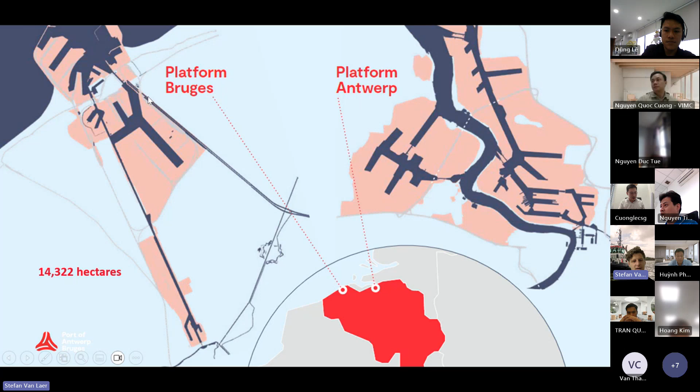So fluvial port, deep sea, but our platform in Bruges is really at the sea and gives us some opportunities in terms of LNG, for example, which I will come back to later.

Yes, you know this already also. So we're the second largest port in Europe, right after Rotterdam, who are our neighbors not so far away. We're the biggest logistical hub in the range of Hamburg to Le Havre. And important is that we're the largest integrated petrochemical cluster in Europe, and actually even the second largest worldwide after the port of Houston. So quite important.

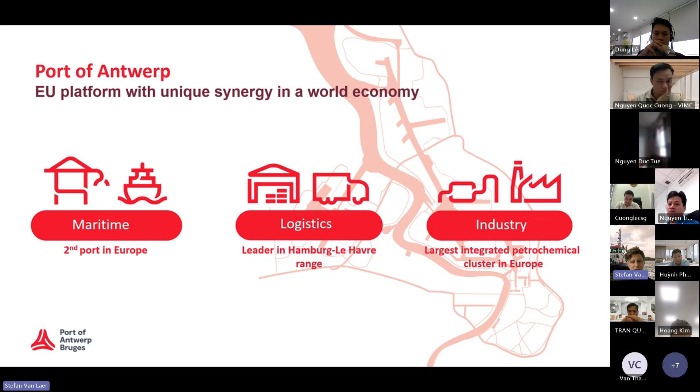Some numbers you already know, but maybe I will focus on those related to energy mainly. We're already today a major energy port with, for example, 40 million tons of oil refinery capacity. Today in Antwerp, we have two refineries, one of ExxonMobil, one of Total Energies.

We have 7.2 million cube tank storage already. We have 1,000 kilometers of pipelines running through our port that transport a wide variety of products. Amongst others, we actually have the second largest hydrogen pipeline worldwide already today, going from France through Antwerp, through Rotterdam. So that's already in the ground today, and we will complement this, of course, with new pipelines in the future. This last one you see is very important with Zeebrugge, but I will come back to that in more detail on one of the next slides - we're a very important LNG hub already today.

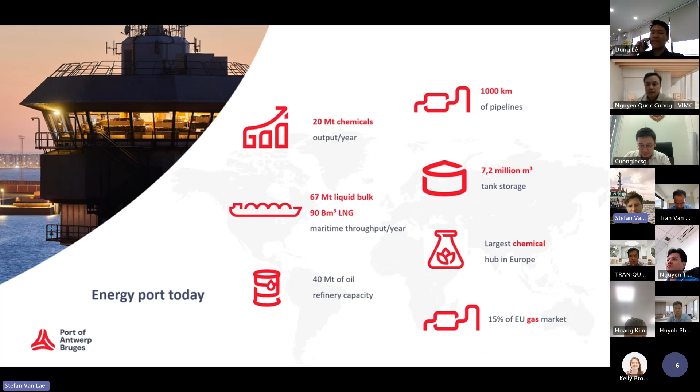So our role as a port, I think you already know: we're a regulator, we operate the ports to get things as smooth as possible. We're mainly a landlord, so all the companies in our ports, like BASF, like ExxonMobil, you name them, they lease land from us, so we're landlords to them. And more importantly, last one, community builder in terms of energy transition. This is a very important one. We try to facilitate for our companies, for our platform, the energy transition as much as possible. We get people together, we have contacts with governments, etc.

So zooming in on our Antwerp platform, which I already mentioned, it's the second largest petrochemical cluster worldwide after the port of Houston, which guarantees a stable supply of feedstock, raw materials, and intermediates. The pipelines I mentioned, 1,000 kilometers already today, so there's a very large amount of connectivity within our ports, which gives us advantages for the import and production of chemical commodities for Northwest European markets.

There are many leading companies, chemical companies, in Antwerp. You see on the right a map with a couple of numbers, and below you see the numbers. So it's really BASF, Ineos, Air Liquide, Borealis, you name them - it's the large chemical companies of this world. They are all active since many, many years in our port in Antwerp.

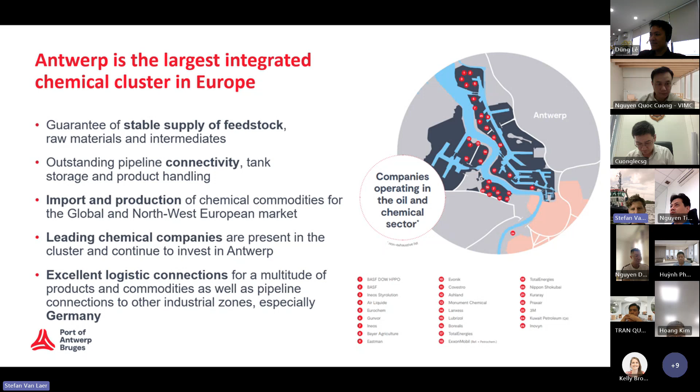So I briefly touched upon this one already. This is our platform of Zeebrugge, and here you see four LNG terminals. They're owned and operated by Fluxys, our gas pipeline operator today and also the hydrogen network operator of the future.

They were appointed last year or this year as our HNO, so they will play an important role for hydrogen in the future. And through this terminal, we actually supply 15% of the EU gas market already today, in the form of LNG.

Since 2022, when the Russian-Ukrainian war broke out, this became even more the case, because Germany was all of a sudden cut off from Russian gas through the Nord Stream 1 pipeline. So we became an even more important supplier to the German market.

Fluxys is even expanding its plans for additional natural gas throughput and future energy carriers, but with the energy transition already in mind. So everything they're building new today, they're trying to build hydrogen ready. New pipelines that go in the ground will be hydrogen ready for hydrogen transportation in the future, for example.

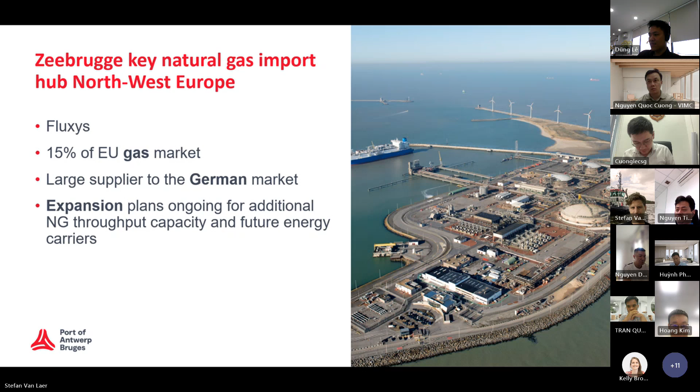Yep, okay, just a nice picture.

Some more numbers. I think I touched upon most of them already, but we're the second largest petrochemical cluster in the world. We have a lot of traffic, both in ships and in trucks, through our ports.

That comes at a price, of course, it's not for free. The price you see on the bottom right is that our two platforms together emit today 18 million tons of CO2 emissions. If you translate that into a percentage for Belgium as a whole, it's probably around 20% of total emissions of Belgium. So it's quite substantial.

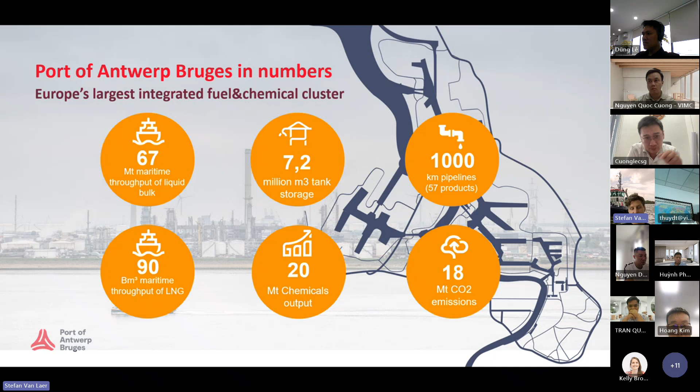So we want to keep our position as a leading chemical hub, but of course we want to tackle that problem. That's what you see here.

We want to get rid of the 18 million tons of CO2 while remaining our position as a maritime throughput for liquid bulk, while keeping our chemical cluster and our maritime throughput of LNG. We will use our pipelines for this, and our tank storage will be instrumental to achieve this climate transition, and we will green our platforms.

So much for the introduction.

So what is our strategy to achieve this climate transition today? Our climate strategy is based on 4 pillars. You see here the 4 circles that all have their own focus.

On the left, we have energy efficiency in heat and electrification, because the best energy still is today the energy you don't use. The best thing you can do is save energy through efficiency. So that's a very important pillar of our climate transition strategy.

For the energy we cannot save and have to use, we have the second pillar: our fuel transition pillar. We have a lot of ships coming into our ports, and a fleet of our own that today mainly runs on very heavy, polluting fuels. We want to transition away from those heavy fuels towards more sustainable options, maybe in first instance natural gas, but in a second phase electrification, hydrogen, methanol, ammonia. So this is our second pillar.

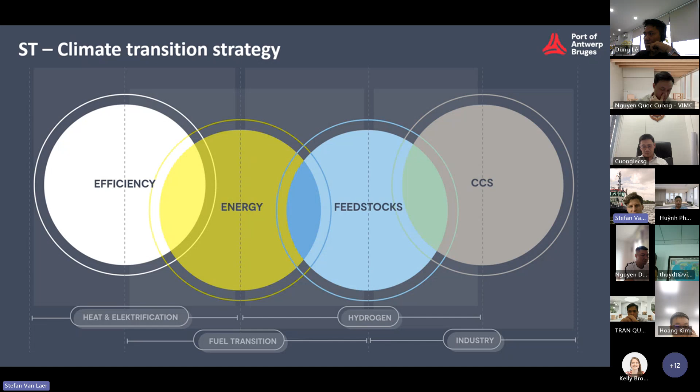No questions so far? Kelly? No, I don't guess see it's anything. No, okay, perfect. So,

For our first pillar of energy efficiency, I want to give you the example of the Antwerp North Heat Network. Within our port we have Indaver, which is actually a waste incinerator. It collects the household waste of our city and tries to get energy out of it. It's been doing that for a long time, but the byproduct of this process is the heat that comes out because of the incineration. For a long time, this high temperature heat, which could be very useful, was not put to use. It was just vented to the air, while actually you could valorize this heat and put it to good use.

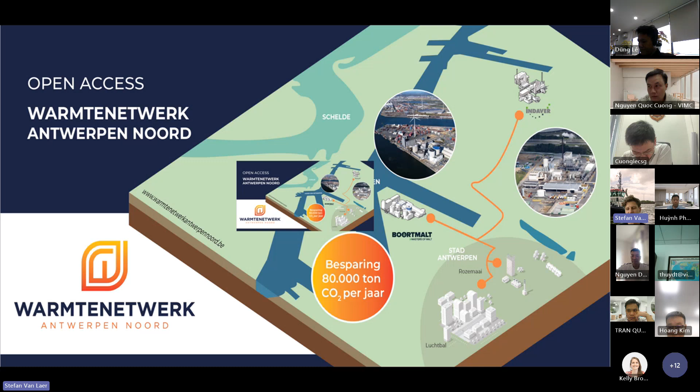If you have a look at the energy pillars, trying to shift away from fossil fuels for our maritime fleet and ships entering our ports, one of the major projects we're working on is the multi-fuel port. I will zoom in on this one. It's a complex, busy slide, but I will walk you through it.

Let's start on the right here, in the top right. To fuel these ships mainly, we will need molecules, and these molecules will mainly be imported. That's why Port of Antwerp Bruges has the ambition to become a hydrogen import hub - I will come back to that near the end of the presentation. We will basically import sustainable green molecules that could be put to use in our ships and other applications, like hydrogen, ammonia, methanol, and maybe in a first phase also methane, because it's a cleaner fuel than the heavy fuels used today.

Some part might be locally produced. In Zeebrugge, we have a 25 megawatt hydrogen production plant that took FID 2 or 3 weeks ago, so there will also be some local hydrogen production within our port that can be supplied to the ships.

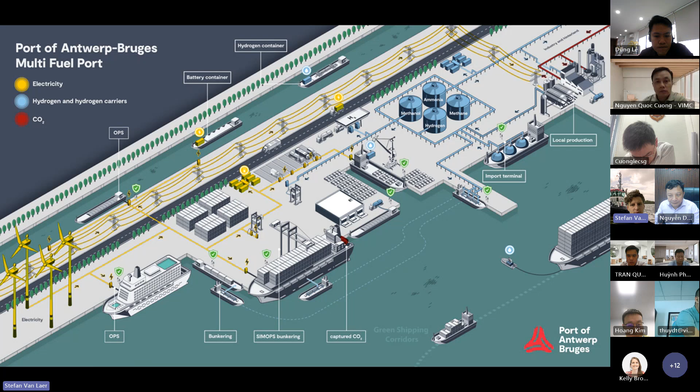So, an example of our multi-fuel port in action. I check the time - okay, still on time.

So coming to the third pillar, sorry - sustainable feedstock and circularity. I will zoom in on our NextGen Demo, or NextGen District, in our ports.

So Next Gen districts - maybe a small piece of historical information. It's about 90 hectares in our port that used to be a car factory, owned and operated by Opel, but it went bankrupt 15 years ago. Since then, we've had some terrains coming back to the ports, as we are the landlord, and we've been thinking about how to put these terrains, these spots, into good use, and how it fits into our energy transition strategy, our climate strategy.

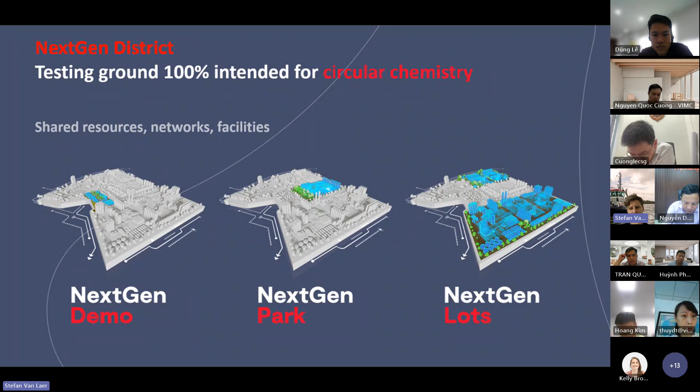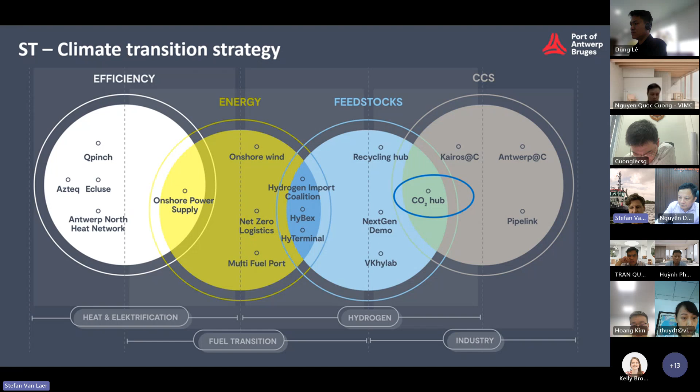Coming to our carbon plans, you see the CO2 hub we plan to be. It's overlapping partly with the feedstock, but it's mainly focused on carbon capture and storage. We have some big plans for becoming a CO2 hub in Belgium and also for the rest of Europe. You see it here, it's also a busy slide.

Let's start on the right side. So I already mentioned we have a large petrochemical cluster. There are a couple of companies looking to electrify, a couple looking at hydrogen to decarbonize, but we also certainly have companies that will have to look at carbon capture and storage to decarbonize their operations, because hydrogen is not an option and electrification is not an option.

So they will capture their CO2, and we have the intention of creating a CO2 backbone in our ports. The companies can put it in the backbone, and then we transfer it to a liquefaction storage unit, so we make it liquid CO2. It is then stored in a tank, and then it could be shipped off to permanent storage, for example in the Netherlands, or in Norway, under the North Sea in old natural gas fields.

In the longer run, we could also do this through pipelines, but these pipelines need to be built towards the Netherlands. You see NextGen again here, so it's a district. There also will be some CCU. So once the carbon is captured, we can also put the CO2 to use on the NextGen district, because there will be certain companies looking to reuse the carbon.

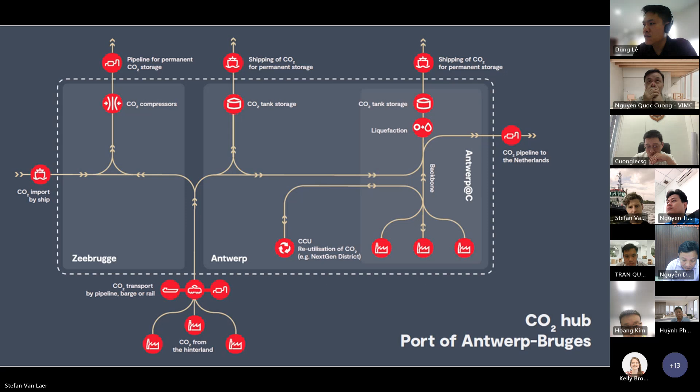Putting everything together in one slide, I maybe won't go too much into detail, but it's all our plans together. It looks like this. We have in our port already 140 wind turbines, for example, generating renewable electricity. We will put this renewable electricity to use directly if possible, or convert it to hydrogen if needed. We will have hydrogen imported from places far away. I will come back to this in a moment.

We have CO2 being captured on our platform and then stored underground in the North Sea. Yes, hydrogen carriers again coming in. So this is a bit the entire chain you see in our ports. And then if we imported the hydrogen and other derivatives, we can transfer them to North Rhine-Westphalia, the hinterland, Germany, everybody who needs it, we can supply the renewable molecules to.

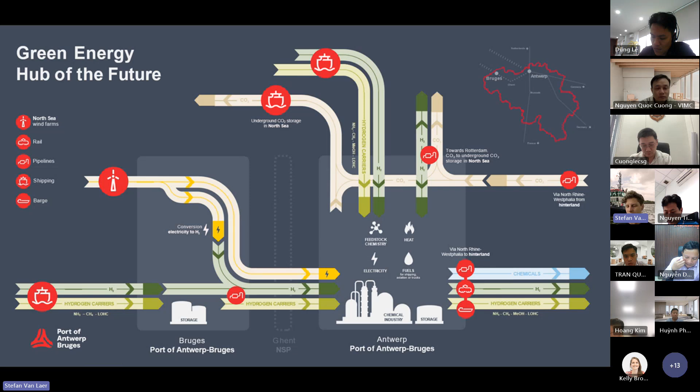So I mentioned in the beginning, I work in the sustainable transition team, but more specifically in the hydrogen team. So coming to my niche, or my specialty, I would say, is the Port of Antwerp as a hydrogen hub.

What you see here is our roadmap, or 2030 roadmap for hydrogen, based on 3 pillars. I'm looking at supply, where we will get our hydrogen and other derivatives of hydrogen like methanol or ammonia. What are the infrastructure needs in our port? And last but not least, where is the offtake? Where are the consumers of this hydrogen, of this green hydrogen, with our chemical cluster, of course, being one of the important destinations for this hydrogen.

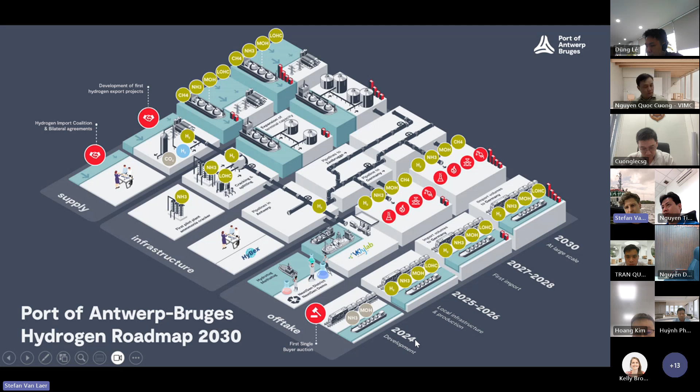I will break up this picture into a couple of parts so we can go through them a bit easier. So: supply, infrastructure, offtake. And here you see the timeline going from today to 2030, what we want to achieve.

In terms of supply, I mentioned in the beginning during the multi-fuel port that a small part will be produced locally. I had mentioned the 25 megawatt plant in Zeebrugge. But of course, to produce renewable hydrogen, you need renewable electricity, and for that you need a lot of sun and wind. I don't know if you've ever been to Belgium, but we don't have that much sun. We have some wind, but also limited. So our potential for hydrogen production in Belgium is quite limited. We will never be self-sufficient.

That means we will have to look outwards for our renewable molecule supply, and we will have to import this hydrogen and derivatives. Already today, we created a hydrogen import coalition with key players like Exmar, Engie, and Fluxys, and we had a study done to look at whether it is economically and technically feasible to have large-scale hydrogen import from, let's say, Oman, India, or Chile to Belgium. We already did that in 2021, I think, and then had an update last year.

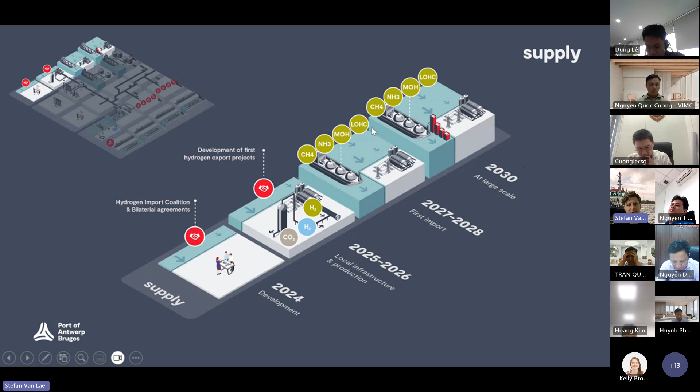This is publicly available, showing that it is possible, and possible at a cost-competitive price. Local production, I already mentioned - we hope to see the project in Zeebrugge operational by 2026. But by 2027, we really want to have the first imports by ship from countries far away, coming to our port in different carriers - either e-methane, ammonia, methanol, or liquid organic hydrogen carriers. And then we scale this up towards 2030, so first smaller imports by 2027 and larger imports by 2030 and beyond, even more scaling up.

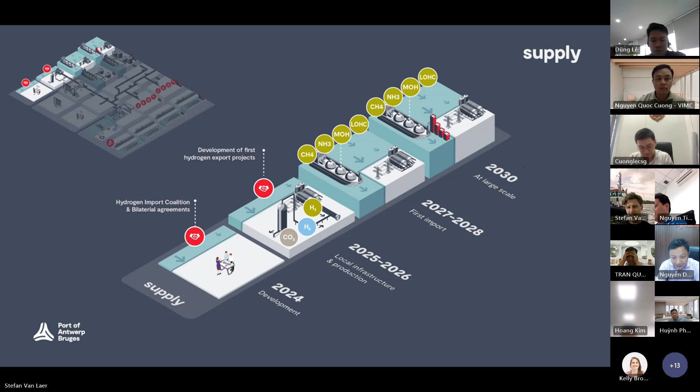This is the supply, I mentioned this already. This is the production plant in Zeebrugge, it's called Hyoffwind. On Next Gen, we have Plug Power - they'll supply 100 megawatts also. We will also have blue hydrogen, meaning gray hydrogen with carbon capture. Antwerp@C is one of the most important projects here, and I think I mentioned already the other things.

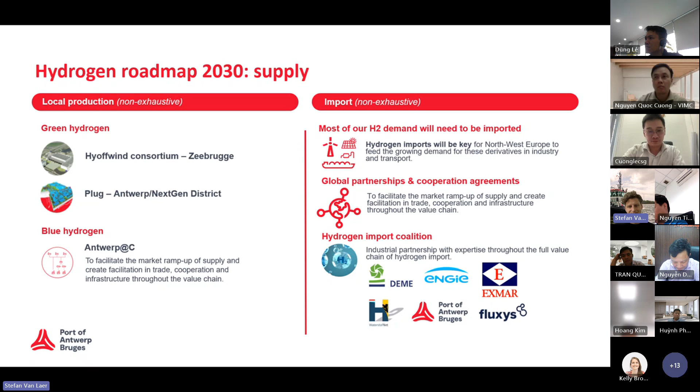So in short, it's North America, Canada and US, with Houston as a very important partner. We're looking at Brazil, where we have a stake in Porto do Açu, so we are partly owner of a port there as well. Looking at Chile very much. Morocco is very important to us because they're in the sweet spot of combining sun and wind power, which could lead to very cheap prices of hydrogen production. Namibia is very important, Egypt, Oman, India, and Australia to a lesser extent because it's really, really far away, and we don't know if the molecules will ever reach our ports, but we do hope so, of course. So a non-exhaustive list of countries.

Maybe important also to mention - I work for the Port of Antwerp Bruges. We also have a subsidiary called Port of Antwerp Bruges International. They focus on providing consultancy services to countries worldwide on port development. They will help developing countries, not only developing countries, but mainly developing countries, in building out new ports. They give advice on how do you build a new port, where do you need to build the terminals, for example, for hydrogen in the future, where do you build the pipelines, how do you build a quay. So this is what they are doing - they can provide you with consultancy services.

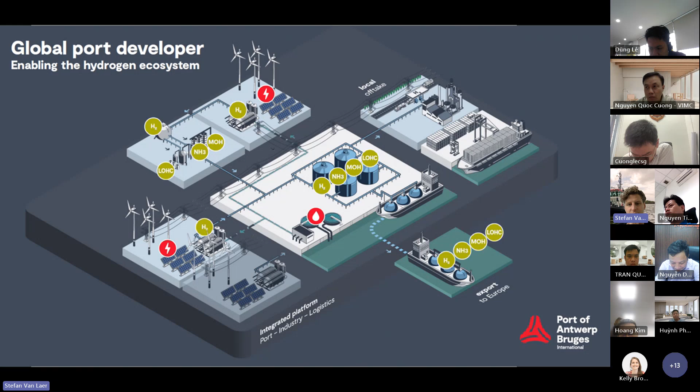For example, one of the most concrete projects they're doing is Hyport Duqm. Duqm is in Oman, they're part of that port project. And also a newer one is Namibia, where they want to build a port called Namport that could be developed to be a hydrogen exporting hub towards Antwerp in the future. Second pillar is infrastructure, very, very important, of course, to make this hydrogen economy a reality.

Most of the hydrogen coming to Antwerp won't be in the form of pure hydrogen. It will be in a carrier like NH3, ammonia, for example. This ammonia can be used directly by certain industries that require ammonia, like fertilizer companies. But most of the time, the ammonia will have to be cracked again towards hydrogen.

We have one company, Air Liquide, who is demonstrating already today on a small scale this cracking technology. They opened their first opening event yesterday of the cracker. It's small scale, but they're looking to scale it up in the future. And we have other companies working on cracking facilities and also terminals, companies like Vopak, Advario, all looking to build large ammonia or methanol tanks to receive these molecules once they are shipped to Antwerp.

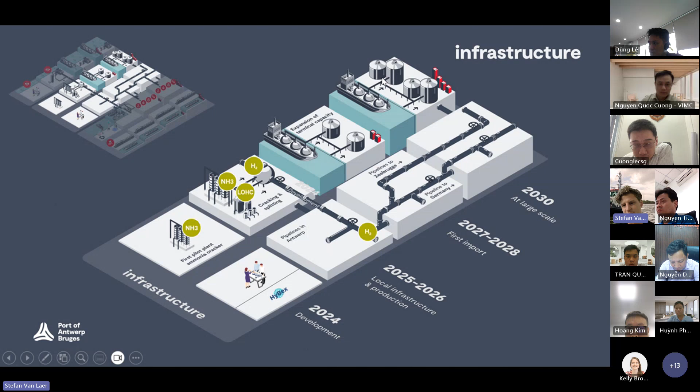Hopefully by 2027, they will be ready to accommodate or welcome these first ships. And in 2030, at large scale, new tanks and new storage capacity will be built in our ports.

Simultaneously, pipelines of course have to be developed. I mentioned we already have the largest hydrogen pipeline running through our country today. This is a privately owned network by Air Liquide, but we have Fluxys as our hydrogen network operator, who will build an open access network in parallel to this network throughout our ports, connecting Belgium internally and connecting us to Germany, hopefully by 2028. We want to make the connection to Germany so we can also supply the molecules to the rest of Europe, with Germany as the main target.

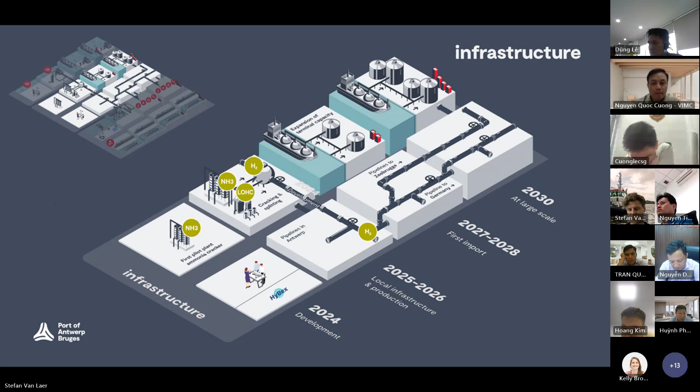These are the companies who have concrete projects in terms of terminaling. Fluxys and Advario have a project together. We have VTTI, we have Vopak, and we have Air Liquide. These are the ones who communicated openly. We know behind the scenes there are a couple of other companies also working on terminaling, so this is non-exhaustive.

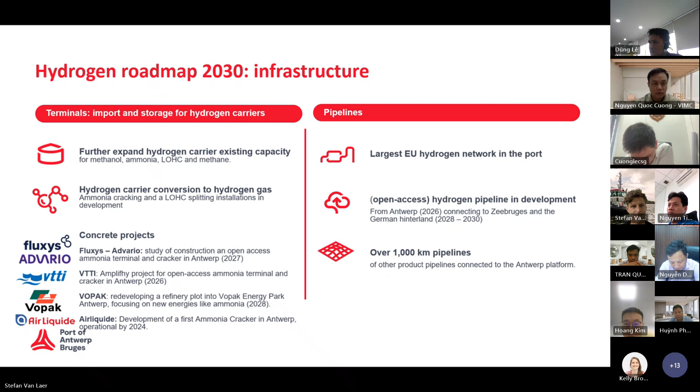Pipelines I already mentioned being built, in addition to our 1,000 kilometers of pipelines already today in our port. Maybe some numbers.

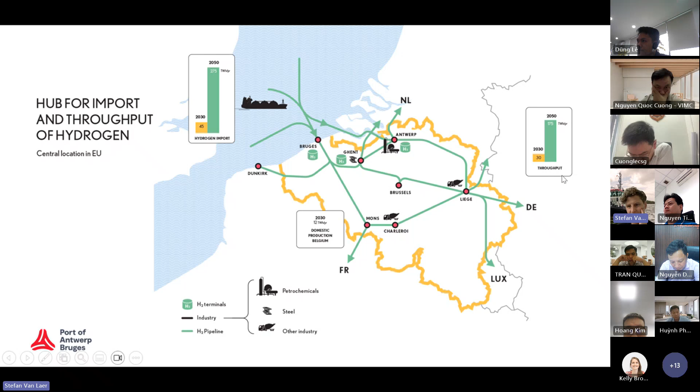You see that we will import 45 terawatt hours by 2030 and 275 terawatt hours by 2050. It's mainly one third to consume locally in Belgium and two thirds for throughput to Germany. So 15 terawatt hours here and 30 will be throughput to Germany.

Coming to the last one, I think I already briefly touched upon it. Our largest issue is offtake, and we can import all the molecules, all the hydrogen we want, but of course you need a customer, you need someone who wants to take off the molecules.

We have some demonstration projects ourselves that use hydrogen. For example, we have a tugboat, we call it the Hydro Tug, that runs on hydrogen, already running on green hydrogen today. It's of course small, but we want to upscale it and buy a couple more. But this is, of course, small scale.

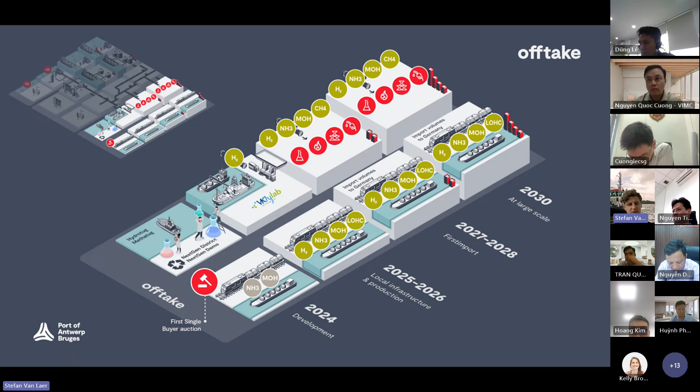The large scale offtake will come from our big chemical companies like BASF, the refineries of Total and ExxonMobil, and the steel company in Ghent, for example. And then also in Germany, there's a large potential offtake in the Ruhr area with a lot of industrial activity.

Yes. Okay, I think I mentioned this. Yeah, of course, also.

The mobility sector, transport sector, is a potential off-taker of hydrogen, with a lot of trucks driving through our ports that have to drive long distances, which is not always possible with battery trucks because they will have to charge, and charging takes a lot of time. So for long distances, hydrogen trucks might become a potential off-taker.

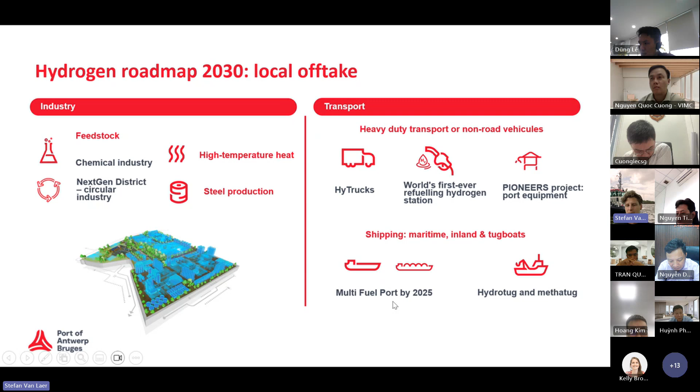And then, of course, also marine. I already mentioned ships bunkering methanol or ammonia, with our multi-fuel port concept also becoming a large off-taker in our ports. You see a picture here of our Hydro Tug. This runs with a dual fuel engine that can run partly on diesel, partly on hydrogen. It's a bit like a plug-in electric vehicle that gives you the comfort of always being able to fall back on diesel if there is no charging station or no hydrogen available. This has already been running in our port for a couple of years.

Okay, I think I went maybe a bit too fast, 45 minutes, but this was my presentation. I don't know if there are any questions.

I see one hand, yes please go ahead. Excuse me, can you hear me? Yes, I can hear you. Okay, thank you, so thanks for your sharing today, but I have two questions for you.

I know that in the port of Antwerp and Bruges there are many projects for energy transition. I wonder, can you share more about the challenges and difficulties when implementing these projects, for example from the government, the infrastructure, the facility, and how the port authority can solve that problem.